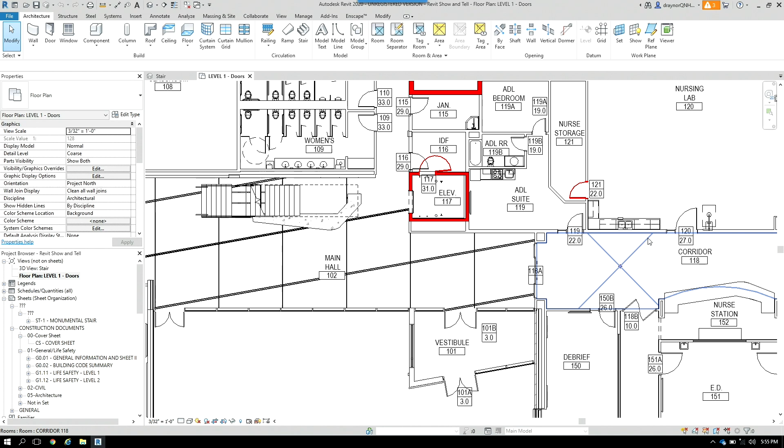And then I can say, oh wait, this door is rated, but it's not on a rated wall. That needs to be switched out. So it's just a really easy visual check for things. I also created a door tag that shows the door number and the hardware schedule. So if you're either reviewing your hardware schedule from a hardware consultant, or you're going through and reviewing submittals, you can really easily go through.

I will usually print this out and kind of highlight as I go, to make sure that I've got the right hardware set with the right door, instead of having to flip back between my plan and then my door schedule. So I've set up all sorts of different QA/QC views like this with things kind of color-coded, just so that I, being a visual person, can look in and see what's going on. This is one example.

So most recently, I'm working on a project where we have, oh, by the way, I'm Laura Kaiser. I work with Clancy and Theys Construction Company. So I've moved out of the architecture world. Now I'm in construction.

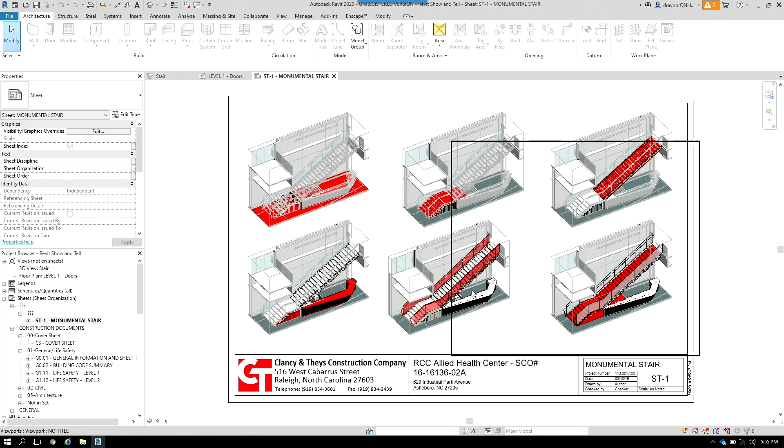So in this particular project, here's a stair, and then underneath this stair, so we have terrazzo treads on the stair. This landing is terrazzo, and then it continues underneath to become a surface for this reception desk that's under the stairs.

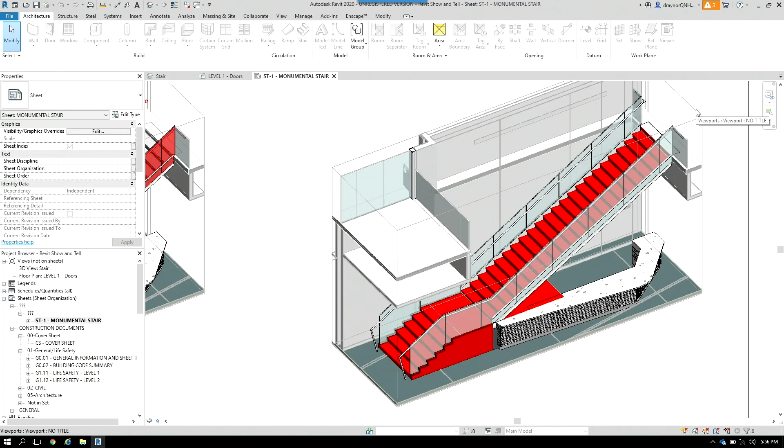Construction scheduling wise, that's actually really complicated, because we've also got down here a concrete stair and then a steel stair above. So we've got concrete stair, steel stair, terrazzo treads, and the terrazzo has to run continuous under the steel stair to become part of this reception desk.

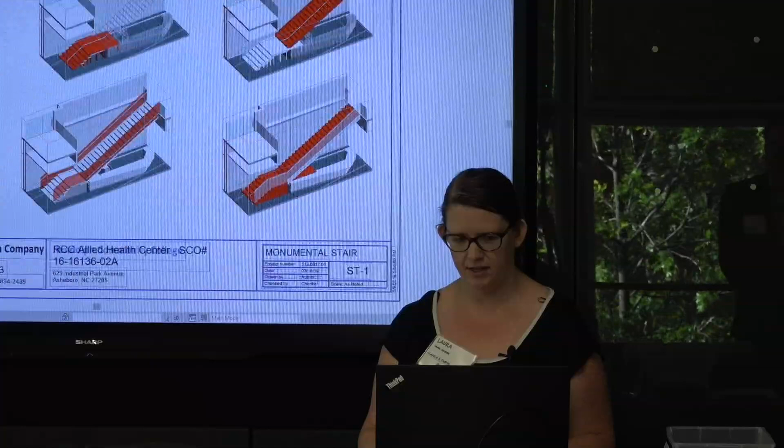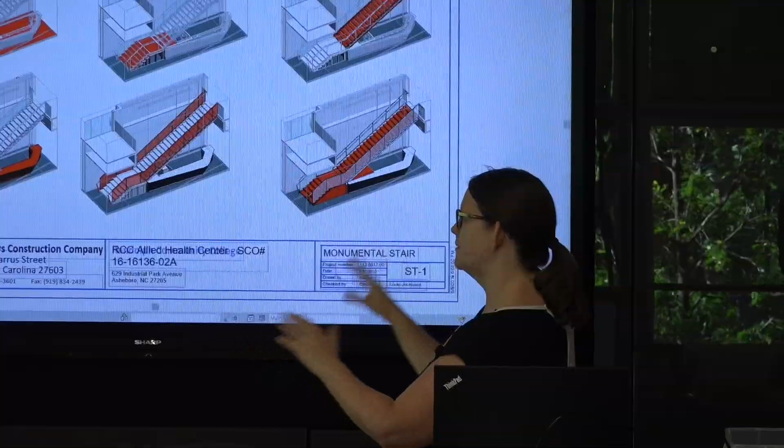So they enlisted our BIM team's help to try and figure out, the first step was to give them just some views of how this actually would be staged so that they could talk to the appropriate subcontractors to see who would be where and how that would go. So this was just really simple Revit visualization. Oh, and then glass railings, how that's all going to work as well. So that they could quickly see how it was going to work.

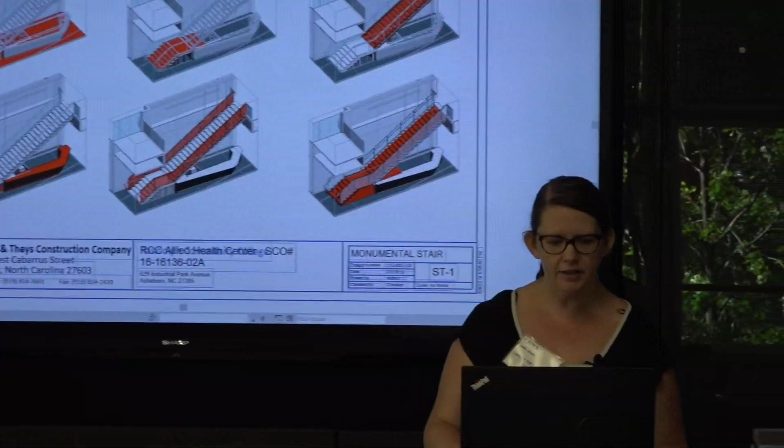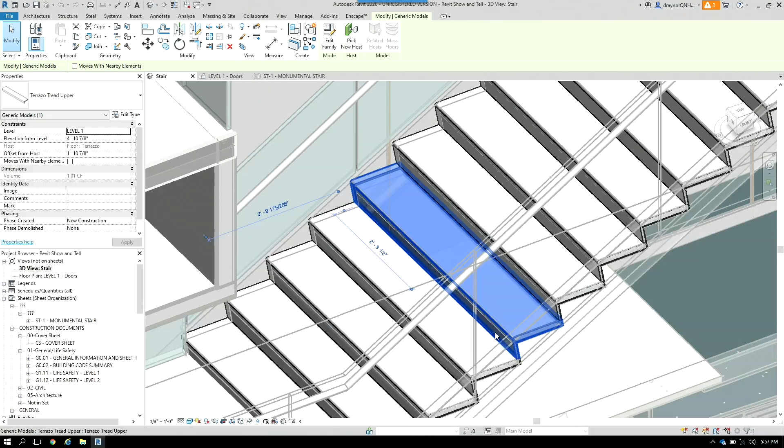And then this was a model that we got from the architect on the job, but then I went in and did some extra modeling on top of what the actual terrazzo tread thickness would be based on submittals. So we were just doing kind of extra modeling just to make sure that this would all work out in the end. So not anything super sexy, but really helpful in just trying to help the construction process along.

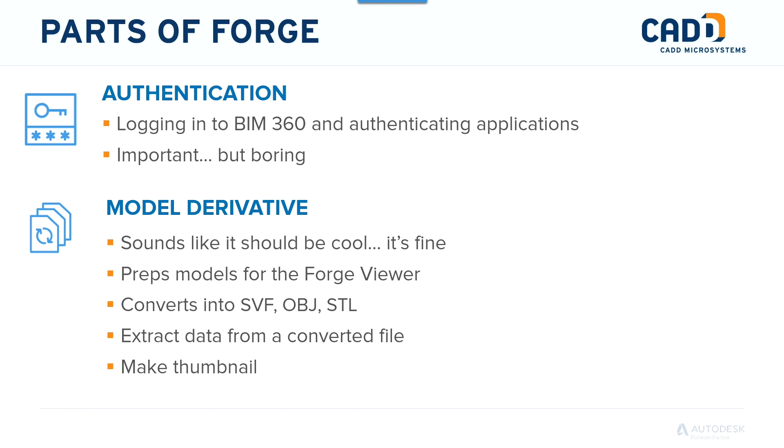There's the model derivative API, which has a really cool name, but it really doesn't do some very exciting things. So when you are looking at your Revit model or your Navisworks model or your STL file or something you've uploaded to BIM 360, you get that large model viewer and you can pan around, you can select things and see the properties. That is not your native Revit file. That has been translated into another format here.

The model derivative API is what has done that translation to the model to allow you to view it in there. So you can convert it over to that file, which is the SVF file. You can make it an OBJ file, or you can also make it an STL file. And you can pull thumb information out of it, and you can make a thumbnail from it, which is great. Yeah, it's exciting.

Webhooks are pretty cool. We haven't seen a lot of use out of these yet. It's a little new. But a webhook is a function that you can build that's going to monitor your BIM 360 folders and your files in there. And if something happens to those files or folders, you can call an action on it.

So for some reason, if I wanted to send a tweet every time somebody successfully synchronizes their Revit model that's hosted on BIM 360, the webhooks would allow me to do that. So obviously that's not a practical example, but that kind of shows you the demonstration of I can get this API talking with this API, and allow changes in my project to trigger things via the webhooks.

So this one, we're pretty excited about it. It tells you when a Forge job is done, when a file or folder is updated or deleted, or your model is synced, and then you kind of build and tell your application what to do when it gets that notification. So that one we like a lot.

There's kind of this all-encompassing one called the BIM 360 API. There's account admin, so changing permissions, adding users. There's the document management API, which we talked a little bit about before, which is the data management API. And then it's a bit of a catch-all for some of the new BIM 360 features. So issues and RFIs and the checklists were kind of released relatively recently in the BIM 360 world.

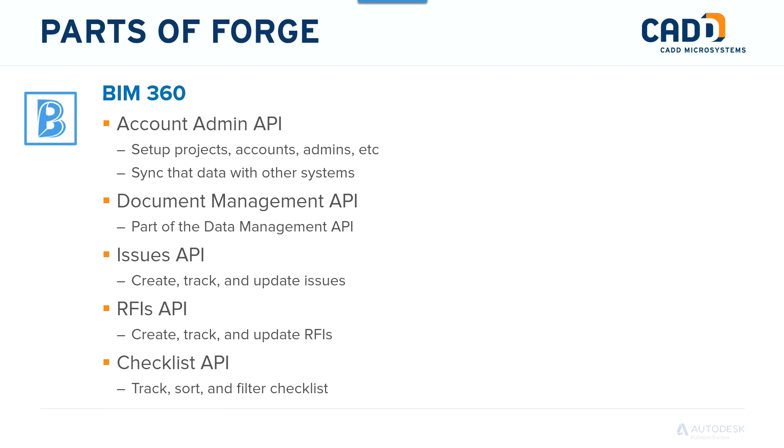The BIM 360 API allows you to manage and create and edit those outside of BIM 360. So they're still going to impact your BIM 360 project and your BIM 360 issues and things in there, but if you don't like that interface, or if you need to do something in bulk, you can create your own program that is going to impact and modify and change all that stuff in your project. So that's what this API does.

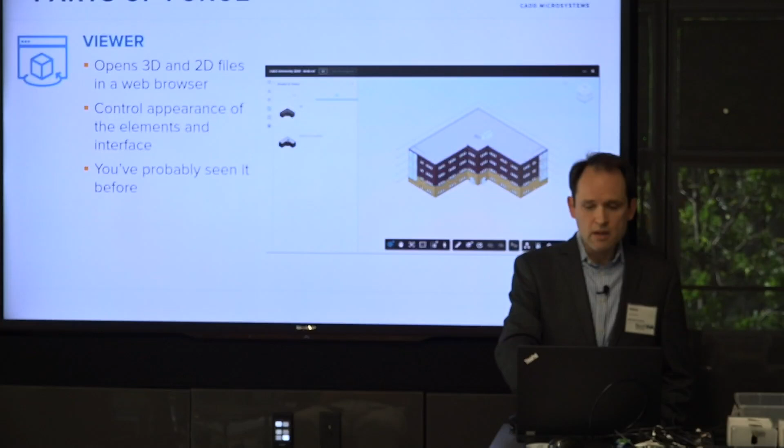This is the Viewer API, so it allows you to open up the 3D and 2D files. This is most likely what you've seen when you've seen demonstrations on BIM 360, or even if you've seen a demonstration on Forge before, because it's graphical, it's there, it's just pretty interesting to look at.

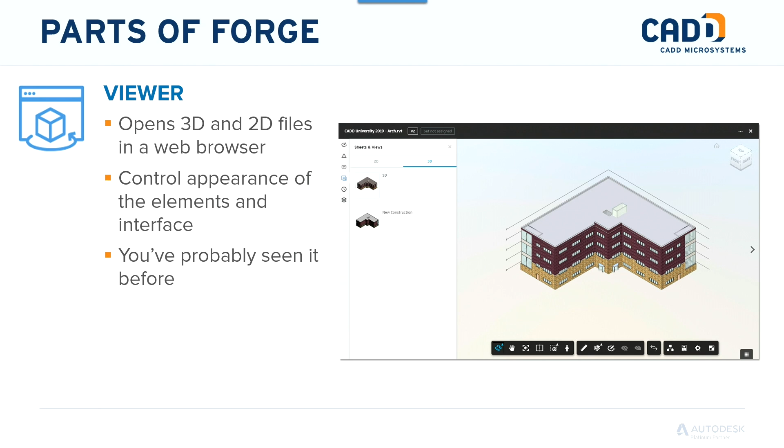So the last one that's here in my list, but the big one I want to talk about, is the Design Automation API. There is one for AutoCAD, there is now one for Revit, there's 3ds Max, and there's Inventor. They each do something a little different, but the basic idea is giving you cloud-hosted access to the software. So if you want to think of a headless version of the application running on Amazon Web Services, that's essentially what this is allowing you to do.

So I'm going to drill into the Revit one, but they all function kind of the same. You can make a desktop application. You can make a web-based application with this. So a Windows program or a website, either one. And that applies to most of the other ones as well. Now, your application and your files do have to be internet accessible, because the Forge API lives on the web. So to call the commands from the Forge API, I've got to be able to look at the internet and call back from the internet as well. Like I mentioned, it's kind of a headless Revit.

What most people are doing, what we are doing in our Forge development right now, is identifying some of our desktop add-ins for Revit that would function well in their own environment by themselves, and you strip out the user interface. And if it needs a user interface, you have to convert that over to your application or a web page as well, because you don't see Revit.

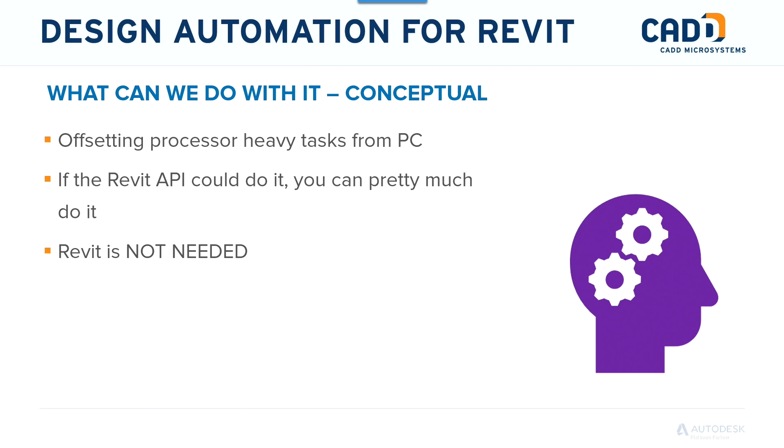Revit is not needed. To run any other Revit add-in, I need to have Revit on my desktop, which means I need to have a Revit license. To run an application on Forge with the Design Automation API, I do not need to own Revit. I do need a Revit model. So someone else can make the Revit model, stick it somewhere on the internet. I could build a web page that manipulates that model, let somebody else work on the web page, and it will go through the Design Automation API and update my Revit file.

So really, what's got me excited about it is this idea of team member collaboration without the need for Revit. Back in my prior life, we did a lot of detention work. I've probably mentioned that before here. It's in my psyche, and I'm trying to forget it.

But we had a fellow who was just phenomenal on security systems. He knew security inside and out. He was responsible for door schedule keying and making sure all the doors would line up and this would lock when this locked. We had our model in Revit, but he didn't know how to use Revit, so we'd print out the schedule, he'd mark it up, and we'd send it back. This was kind of before the Excel connections.

At this point, I would seriously consider designing an application for him that only looks at the doors. It only peels out the door hardware and key information that he needs, and he can update it and push it directly into the Revit model without needing Revit at all.

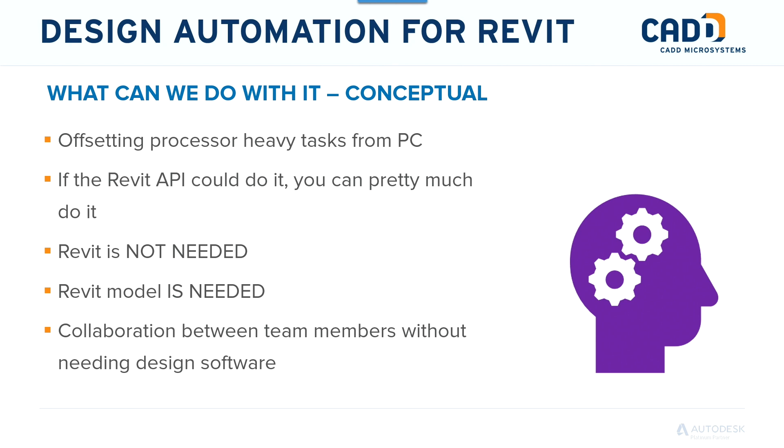A couple months ago, I was up at the Autodesk office in New England, and they had what's called the Forge Accelerator. Has anybody done an accelerator before? It's kind of like nerd camp - you go there for a week, say here's my idea, here's what I want to make, and their inside team is there, and you work with them and bounce things back and forth. So a lot of these ideas are things I saw other people working on at the accelerator.

This one was pretty cool - this was an online family parameter editor. So if I have some shared parameters now and I want somebody else to use those shared parameters, I have to send my shared parameter text file. I have to ask them to load those parameters up into my family. Hopefully they get the right ones, and hopefully they're type or instance, whichever one I need.

This website they built, again very proof of concept, but you could see where it's going - you could load an RFA file up to the website, click a button, and then the Design Automation API would push the parameters in there automatically. They would download the RFA, and it was ready for them to use. No weird interaction - obviously they could build a bulk uploader for it and have it do bulk.

The next steps they wanted to do was not only would you push the parameters themselves, they'd get a little form online, so you could start filling the parameters out, and it would push all those into the RFAs as well and have them all ready to download. So that was pretty cool.

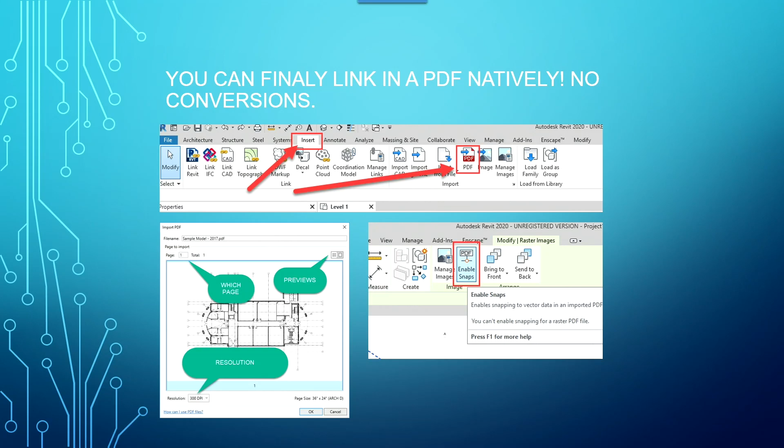Let me see, there it is. I'm going to pop Revit open here in a minute and do some live demonstrations. But basically, on the Insert tab, press the button for PDF, just like an image file you normally would, and you get this little pop-up that comes up. You can do thumbnail previews, and you can pick which page of a multi-page PDF. So if you've got 10 sheets in your set and you're linking another drawing out of the set of PDFs, you can pick which page. You can also choose a resolution, and of course, the higher the resolution, the better it looks, but the more it takes when you go to print with raster. Yes, PDFs will require you to print to raster.

Another really cool one I'll show you at the end here: if the PDF was printed to a PDF versus scanned to a PDF, you can actually use it to snap to. That makes it really nice. You don't always get it, but it's nice when it works.

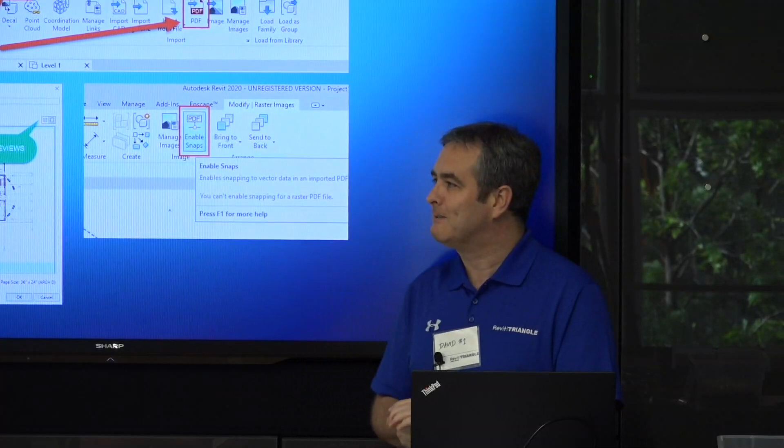I'm sure that does affect the quality, and I've already seen tweets going out about people testing the quality and accuracy of it. They would take a Revit model with walls at 30 degrees, export it to PDF, bring it back in, and see if they still get 30 degrees, and they get 29.99999. Now, some of that might be due to anti-aliasing when it goes to print. I'm not sure, but there's definitely some accuracy that you might have to worry about for fine-tuning. Revit tends to be picky about those things.

So let me see. Alt-Tab. Close this one. So we're not doing a monumental staircase, you would not want me doing stairs. Let's see here, sample model, is that it?

We'll come back to that part of it later. But for now, it's going to come up here and insert, hey, PDF. I have one prepared here that will look very similar to what you see back there. Hey, 72 dots per inch, all the way up to 600 are our choices. This one only has one page, sorry. Hit OK.

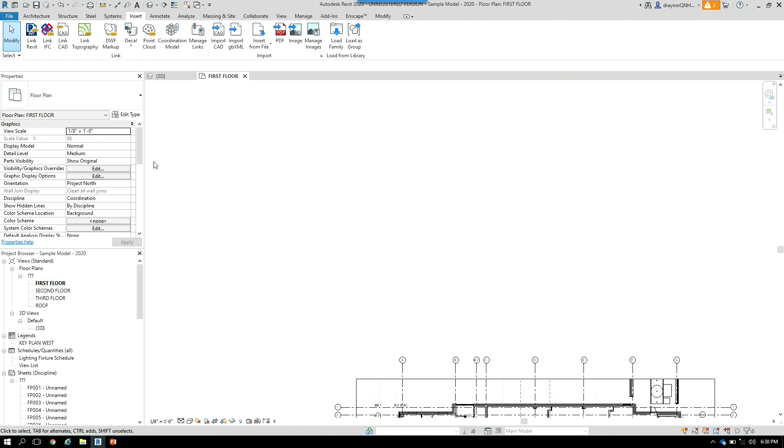Being outside of my crop region, I wonder if I'll see it. No. Plop it right there. Turn off cropping. And there is the PDF. Pretty nice, pretty good quality. You could already use that as a background if you needed to.

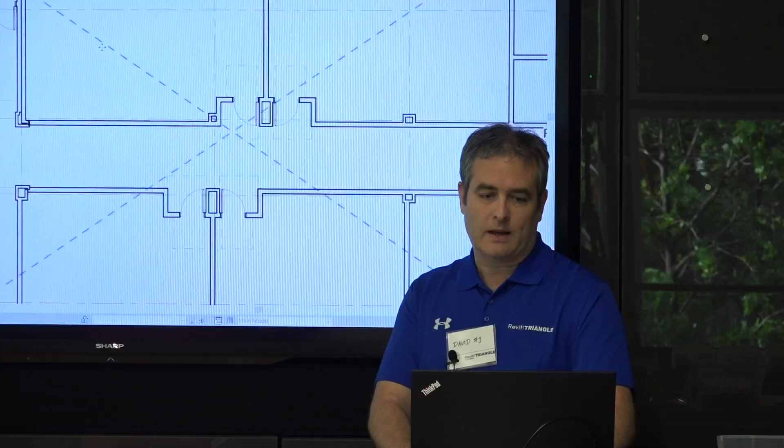Also notice you can come up here and think you can override by element and say, oh, you can't halftone it, but can you change the color? Nope. Problem with thinking on the fly. Okay.

Does it scale? It comes in 1-to-1 is what I expect. If I measure this door, it should be a 3-foot door. So if I come in here, that's usually my go-to check. Yep, 3 foot. It was an 1/8 inch scale drawing, and this is an 1/8 inch scale view. So you will need to pay attention to that.

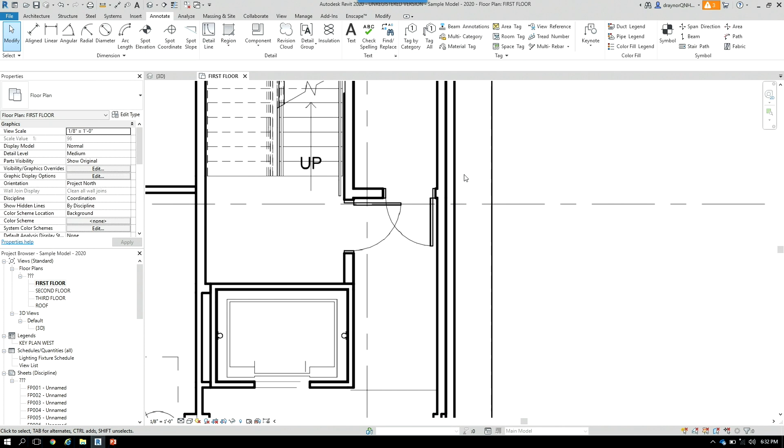But now if I come up here and I have it selected, I can enable snaps. Now with that enabled, I could go to Annotate, Detail Lines, and use the Pick Lines button, and if I pick a line, it is actually creating lines there, directly over that wall. But why would I start with just lines? I mean, walls are essentially just lines. Why don't I just go to walls?

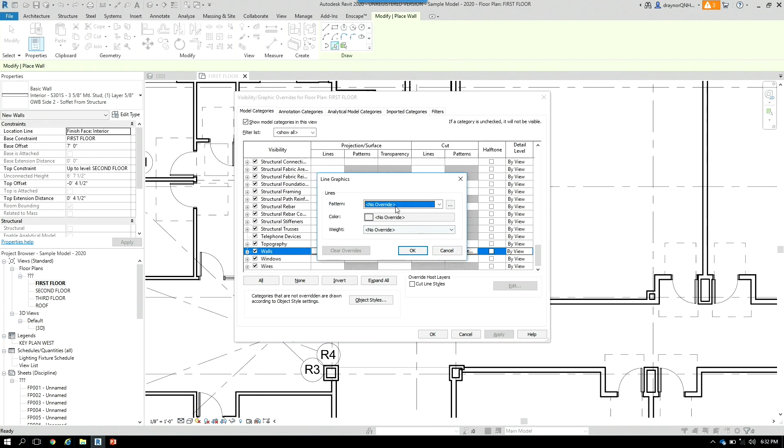And then I could pick a line, and I might say I want the finish face interior here. And just for clarity, I'm going to make sure our walls stand out. I'll make them pink, and I'll give them a weight of like 5.

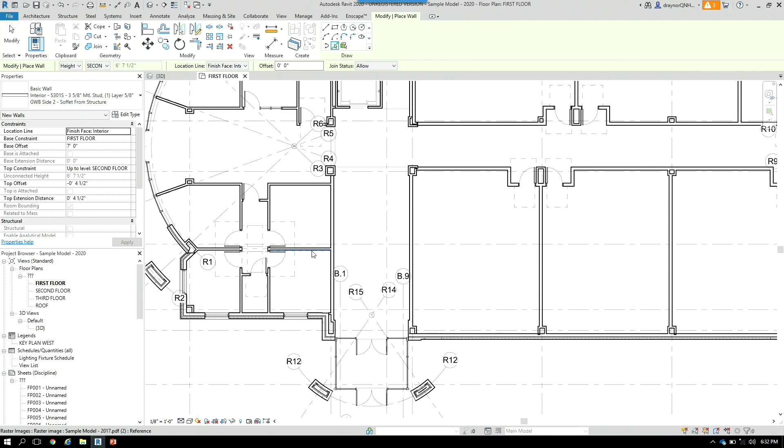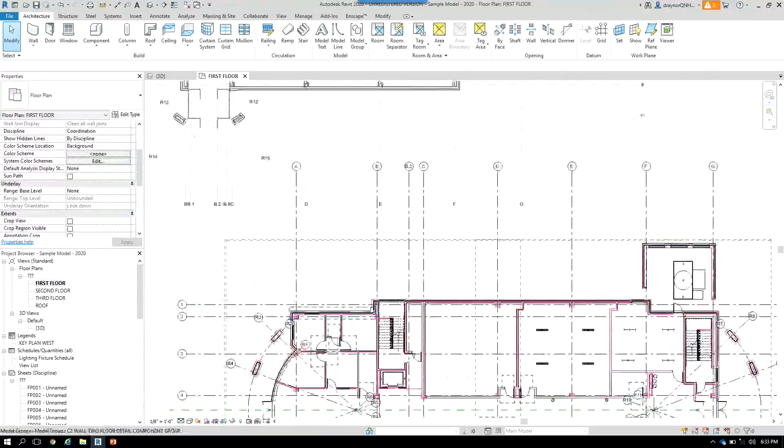Okay, what am I doing here? Says it's not visible. But I turned off cropping. Well, that's not a good choice. Well, that's where I was doing it earlier. No, it has a foreground, background option. It does have that, one of the options bar. No, that is not.

Isn't there like a blog post, the 50 things to check in Revit, why can't I see my elements? It's because the base offset of your walls itself is 7 feet. There you go. There we go. How did that happen?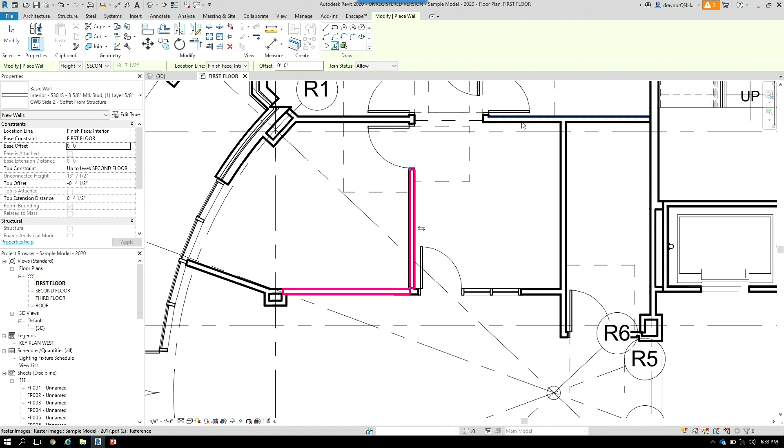Now, unfortunately, it doesn't recognize that there's doors there, so you'll still have to use the old trim commands, trim extend. Okay, that's enough of the error messages. You get the idea. If it's a wall, you can pick the exterior face of it, and since you know the thickness of your wall, just pick and click all the way around to trim and extend. Pretty cool feature.

And I'm excited to use it for ductwork or piping when those come about. So let's see, PowerPoint. I did, yep. If you scan it in, you don't get the same thing. Yeah, so that was all for that one.

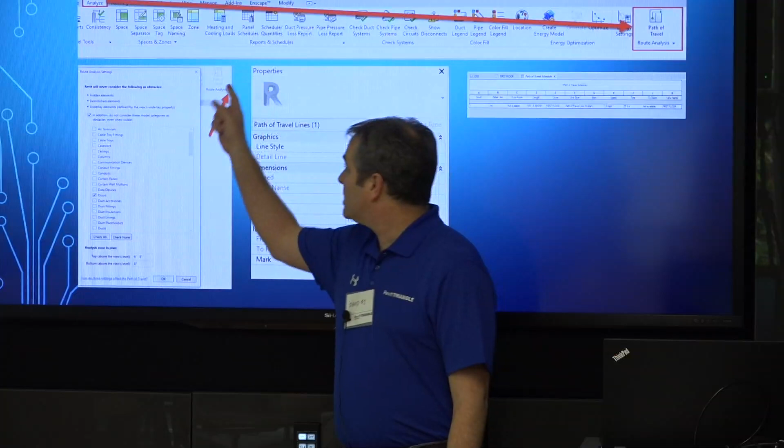Path of travel, this one's kind of cool and sort of fun to play with. Again, you go to the Analyze tab this time, but they hid this one all the way on the other side, so it's almost like a tennis match, you're going to go back and forth a bit. Once you get it open, I wanted to point out, you know how they like to hide things under these little arrowheads? There's a teeny tiny arrowhead in the corner there that brings up a pretty important dialogue. If you would like casework to be considered an obstacle, you'll need to make that choice. Otherwise, people will run right through it.

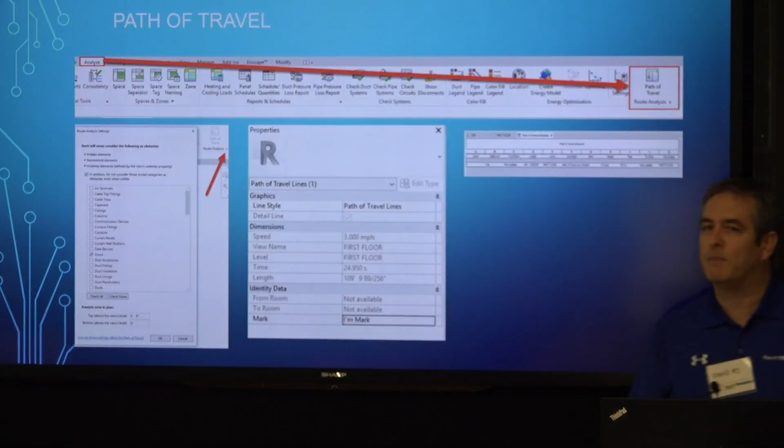Furniture, I think you'll have to select, a few things like that. But right out of the box, I found it works pretty good. The other thing I thought was funny is most of the properties about it are not editable. So if you think you walk faster than 3 miles per hour, you're going to have to wait till they open that up. They also don't have the to or from room available yet. When I looked it up, they said that's for future use. So I'm curious to know what they're going to use that for.

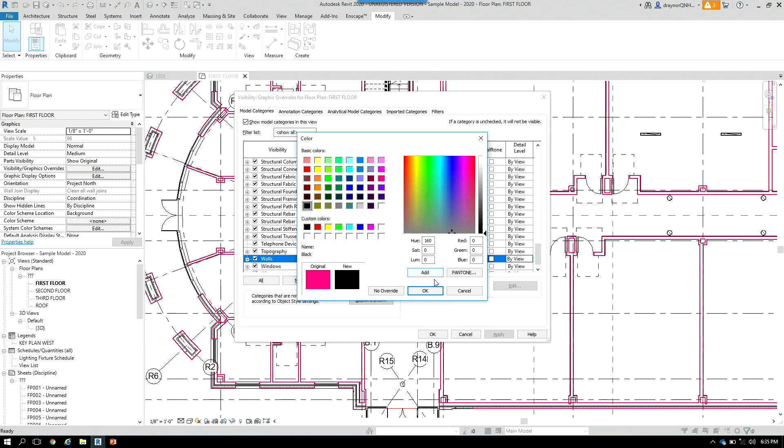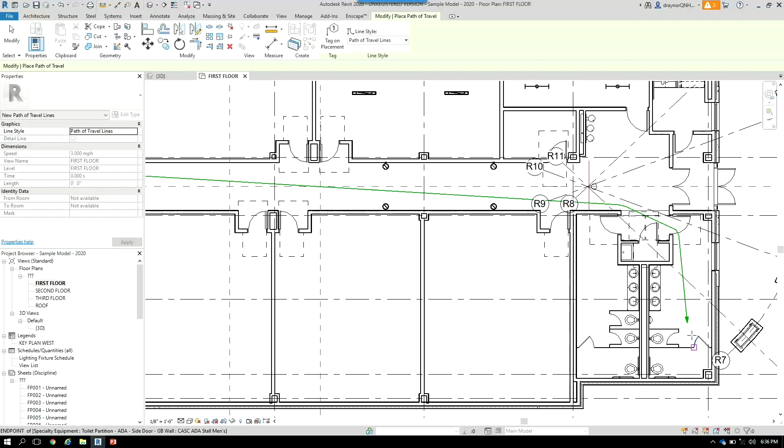All right, so a quick little demo of that. Come down here to my other model. Hey, there's my pink walls. Let's see here. Okay, there we go, and it's on the Analyze tab, all the way over on the other end. And you really just pick 2 points. So if I want to know how long it takes this person here to get to the restroom over here, it automatically goes through all the doors, kind of noticed it went through the window there, all the way down to the bathroom. And it really does pick whatever point you pick on.

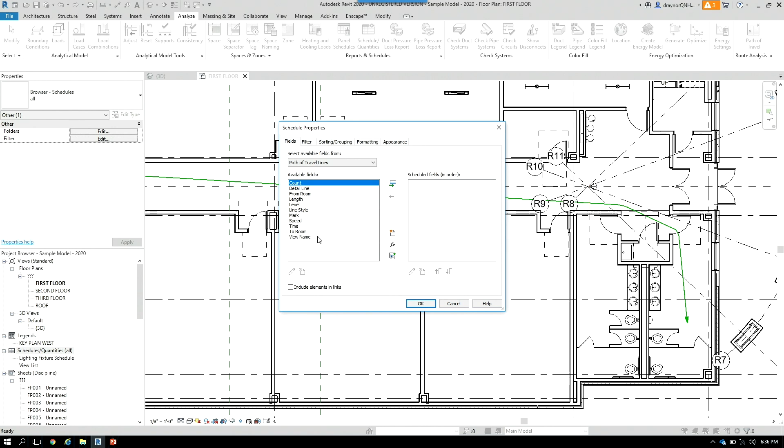If I select it here, there's those same properties, and you can give it a mark value. If I can type in there. There we go, path to restroom. Now, the reason I wanted to go ahead and put something in there as a value for that is you can schedule these. So, new schedule, path of travel. And you can pick all these properties to add to it. And just like with any other schedule, you can then do calculated parameters, in case you did think you walked faster than 3 miles per hour.

Now, I found that pretty interesting. And of course, I wanted to see where some limits were, so I tried going to the second floor and routing a path out the front door on the first floor. It did not make the leap from one floor to the next, so room for improvement there. Or maybe just a couple of compiled things that you add together, get to the stairs, out of the stairs, would probably work.

I could see it being useful for testing egress distances, not necessarily giving you a final product. Yep, the comment was that she could see it being useful for testing egress distances, not necessarily a final product.

So I did notice that the line style up here is path of travel lines. If I went to a hidden line, though, it does change the style of it. So it's whatever line styles you have defined. It defaults to that one, but I think you can change them.

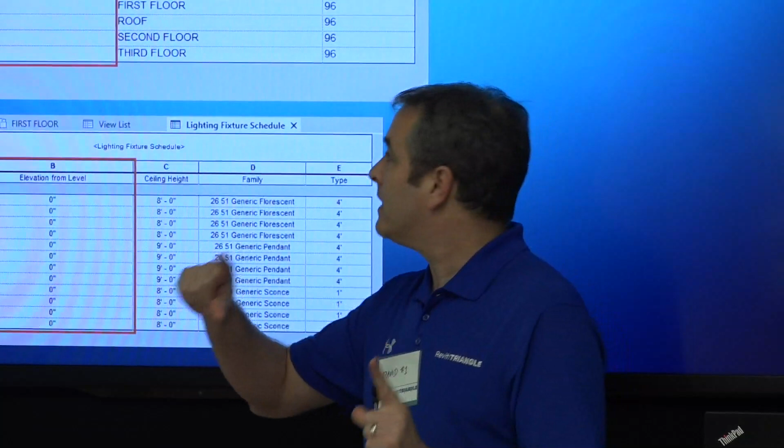Okay. Now here's one I'm excited about. They finally started opening up some new properties that we can add to our schedules. Now, I use scope boxes heavily because I like all of my views to be looking at the same place. Now, the only downside to that is sometimes you want like an odd-shaped viewport. It's not such a good strategy for that.

You tend to wait till the end of the project and then remove all of that work. All of the work of associating the views to the scope boxes. But that's a very quick way to lay out a project. Well, here you can quickly see on a schedule what views are associated to which scope box. That's pretty awesome. Another one they've opened up to us is the elevation from level.

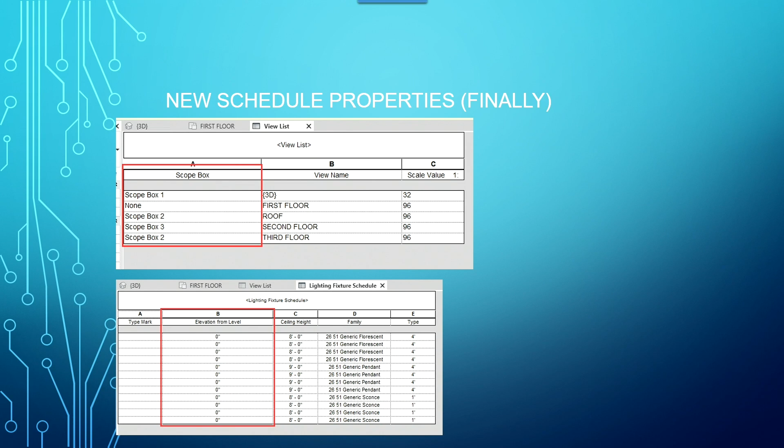For years, I have harped on offset being a useless parameter because you could not tag it and you could not schedule it. Well, imagine you have light fixtures, air terminals, receptacles, wall switches, and you want to schedule the offset. You had to make your own parameter. And that's kind of what you're seeing here.

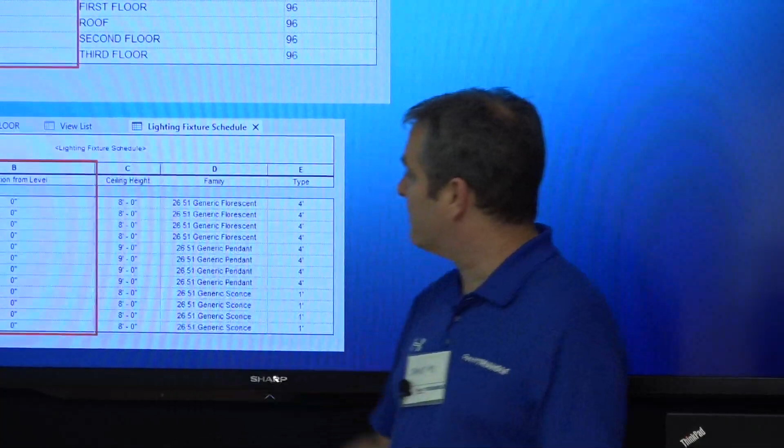I have my own parameter here for ceiling height, but I won't have to use that anymore. There's now elevation from level, which may change a lot of my content, which is unfortunate. But that's the price of progress, right?

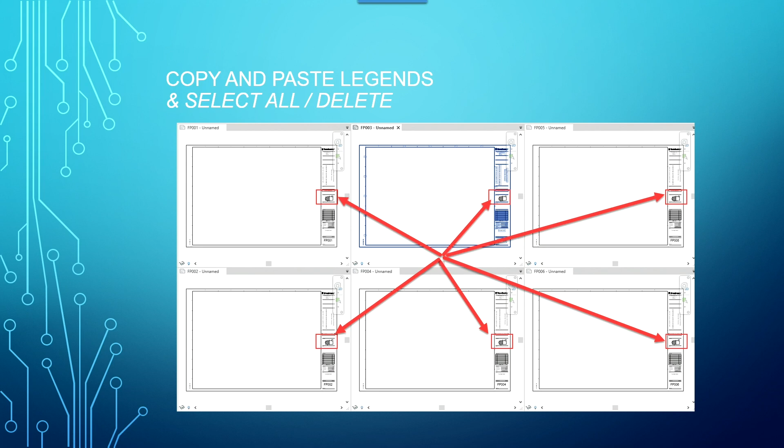Another one that I'm very excited about, you can finally copy and paste a legend from one sheet to another. And then if you regretted that decision, you can actually select all and delete them. That really opens up the power of legends being able to be on multiple sheets, because before you had to place one on every sheet. And hopefully you did so in the same spot every time.

So a lot of people wrote programs and add-ons like we were talking about earlier just to copy and paste legends. So thank you, Autodesk, for finally opening that up to us. That one's been frustrating for years. And I think that's all the ones I've prepared for.

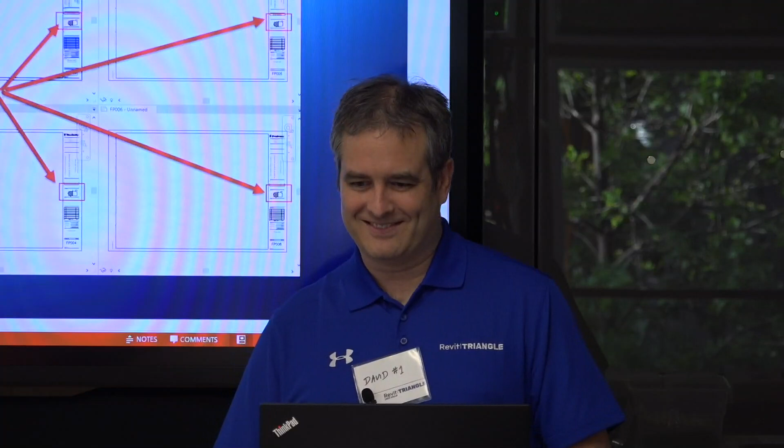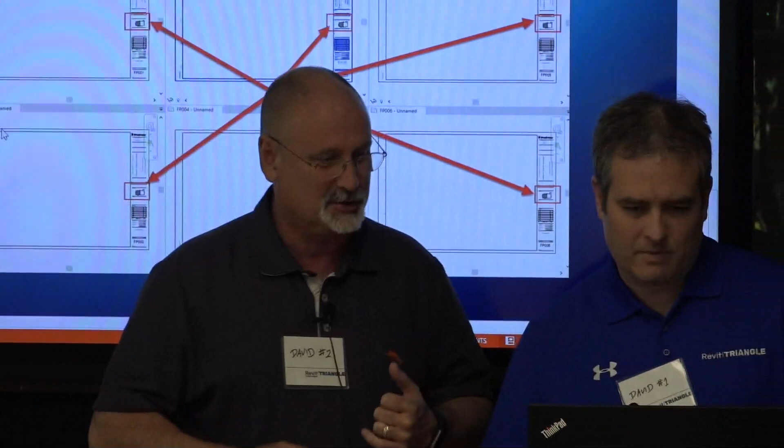I'm going to see if, see here, yours is. This is what happens when you let two of us drive. It gets a little bit scary here. You're driving. No, I'm driving. Right-hand driver. Nope, not that one. Oh, not that one. Jason's already done that one. Oh. Yeah, we don't want that one again. Where is yours? Revit. Yeah, Revit 2020 electrical updates. I'll get out of your way. Okay. I also have to open up Revit too, so let me just kind of.

I had to turn my mic on. Now you can hear me, right? So do I need to start over?

No. But either way, what happened is we actually got involved with looking at how we could improve what electrical is doing. So there was a big push this past couple of years to make things work a lot better. And every Thursday night at 8 o'clock, every 2 weeks, I'm working with the development team saying, okay, how do we make this better? A lot of good people helping out with that. Craig Woods, just another person that was helping out with this.

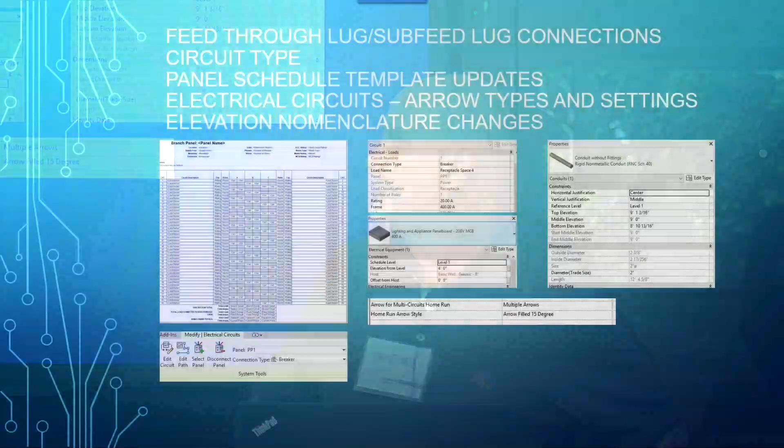So one of the things that's really cool about it, to me, is that relationship between Autodesk and the customer, and how the program works is evolving at a better rate the last 2 years than it has since I started working with the product. And that was a long time ago. It was Revit 4 when it was out. So I want to talk about electrical a little bit here tonight and kind of go through this. So we're going to cover a whole bunch of stuff here at once.

One of the big adds right now is feed-through lugs and sub-feed lug connections. These actually work now. So I can create a sub-feed lug type panel so I don't have to kind of fake it to make things go together. When you create a circuit, there's the ability to add a circuit type now, whether it's a breaker or a feed-through lug. Because of this change, they've made some changes to the panel schedule templates to allow for different loads that are being passed through from one panel to another.

The electrical circuits now have the ability to customize arrow types and how you see home run arrows. Before, you might have been lucky if you had two circuits going together that you got the arrows to show up correctly with two arrow heads on the line. In some cases, I've actually seen arrow heads show up on every single wire. So that was a little bug that kept showing up all the time.

And like David was referring to earlier, there's some elevation changes that have really helped us out. So the Dynamo routine, the only one that I've ever written in my life, about showing bottom of pipe elevation, I can actually throw that thing away now. So that's a good thing. Again, these are just some of the MEP things that we're working on. I've got a few examples of pictures here to show you.

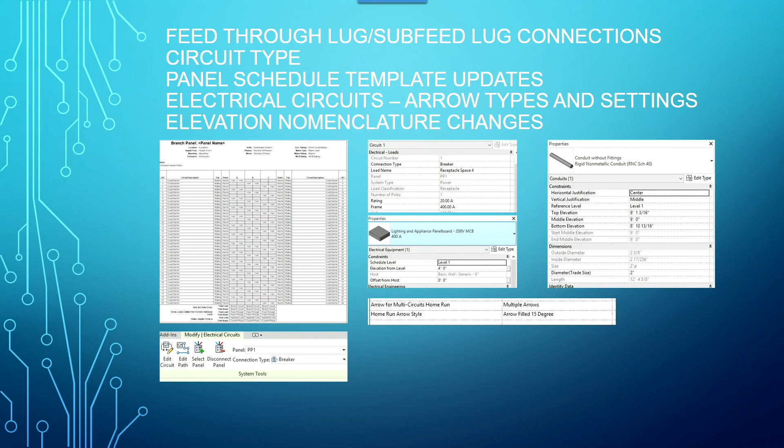So let's just jump into the program here real quick. I have to go into my vision here so I can show you this. So first off, let's talk about what we've got with this particular view. If you take a look in here, you see I've got some devices that are already connected. And if I take a look at this particular set of devices on this circuit, if I select the circuit, you're going to see a couple of options up here that are new.

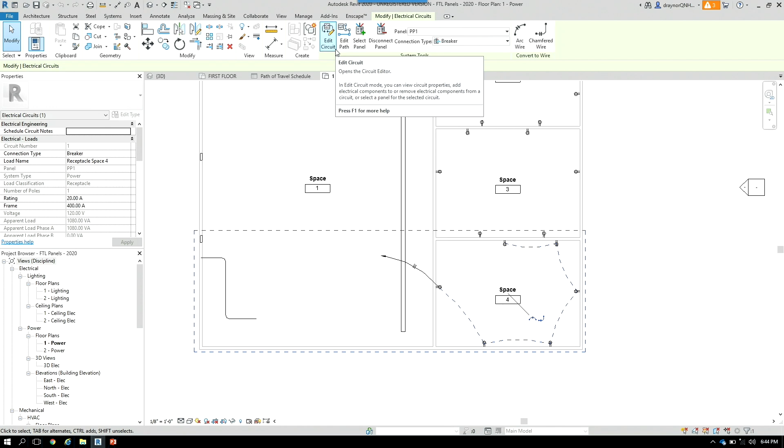Now, Circuit Path was something that came out in 2019. I don't know how many people are actually using this. This is actually a great tool because it helps you get a more accurate voltage drop calculation. By default, the circuit path goes to 9 feet, but you can adjust the height of it and make it a lot taller or shorter as you need to, and you can actually edit a representation of this path. So again, what we're trying to do is get more accurate load calculations into the program.

With this particular connection, when I created the connection, I can say that this is actually going to be a breaker connection. So this is a normal power connection. I've got a normal circuit in here, and what I'm trying to do is to create that relationship as a breaker. So when I come over here to my other panel, I've got 3 panels in line in here. I can select this, and as I create the circuit between these devices, I can say, okay, what panel am I selecting to? Power panel 1. And now I can pick feed through lugs or breaker. So you see how I automatically do that relationship.

Now the really cool part about this is I can actually have an 84 circuit panel schedule that is carrying the loads correctly all the way through. So even if you have multiple panels, and you can go to a 128 circuit schedule, it doesn't matter. If I do 3 panels together, I can sum all that up, and then when I do the panel schedule, you'll see how the loads are coming along. So again, creating the circuit is still fairly easy in here. It's not really any more complicated than it was before.

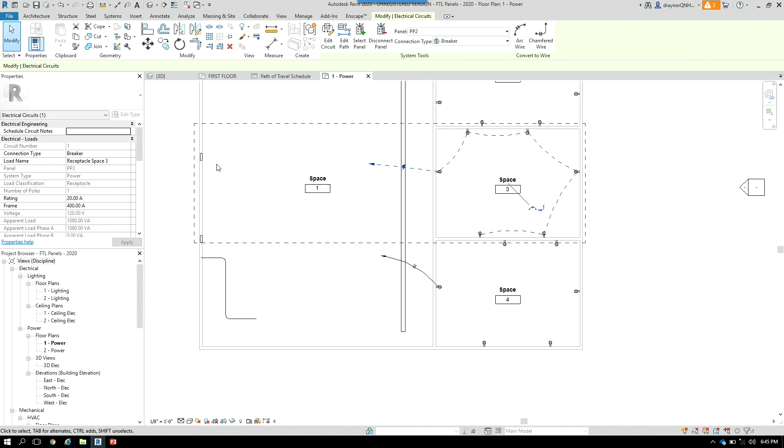I just grab some devices, filter them out here and say, okay, I'm just going to do electrical fixtures. Say okay. And I'm going to create the power circuit and say, let's go to power panel 2, my second circuit now. So I've got that feed going through to that other panel. Now when I come back and do the panel schedule for this, I'm going to choose my default template. This is one that I just made a little while ago based on the default one. For feeding to an 84 lug panel, you see the load carrying through for that particular device.

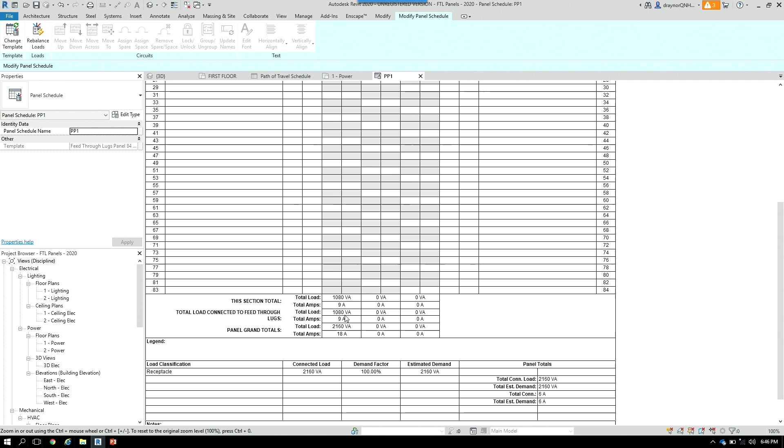Now, this is just one where I don't have the whole load showing up on this panel, but you can see where I've added a section in here and where I have my feed through lug connected. So you see how the load is passing through here now. I've got the total load from both panels, and I have the load from this panel and the load from the other panel adding through here now. This is a huge improvement. I don't know how familiar you guys are with doing electrical drawings, but the workarounds that we had to go through to get this stuff to work were just crazy, the things that we had to do behind the scenes to make it work.

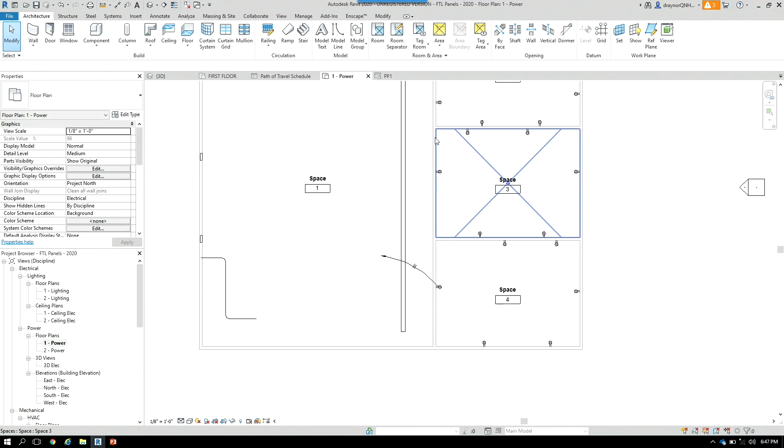We were actually manually putting these values in here, and that was not a good way to go with things. And I can continue to add loads to this. So as I go back over here to my power plan, and I do the same step in here, I go back and I'll create one more circuit here. Grab these guys, filter them out. Say, hey, let's just do the space tags.

Pick OK. And now I can come back over and say, all right, what am I going to do with this circuit? I can again select the circuit that I want to be on, 1, 2, or 3. So if I assign it to panel 3, I tell it it's a breaker in that circuit. Now I can do the same thing. I create that relationship, and I say, all right, I'm doing a power connection. This is going to become a feed-through lug.

And now it's going to tell you that if this panel doesn't have this property. This is a nice little better solution than just getting the old, you remember in the old AutoCAD days where you used to get the red circle of death? And then they gave you the yellow triangle of hope. That's what we actually called those things. You get the yellow triangle message, and it's like, we're going to give you a little bit of hope and maybe tell you what's wrong.

Well, in this case, it's actually saying, hey, this is not enabled, it's not checked. If you want it to be fed through lugs, just check the parameter on the properties and then set the connection type. So all I have to do is say enable feed through lugs, and it creates that connection, and then all I have to do is just basically select my panel. So you can see how I'm actually daisy chaining several panels together here. And as I go back to my panel schedule, I'll see all those loads populated all the way through.

That's cool. And when you think about data and how we're parsing data now, and as you look at Forge, you look at what Jason was referring to earlier about being able to harvest that data out of the model. This is a more predictable result for the data that we need, that even if we go to external programs to do load calculations, this is a way that we can get a better representation of that data of how it's supposed to be connected in the model. So that's a pretty cool little feature, and when you think ahead about what Autodesk is doing with this, of exposing this data to make it more flexible, this is just a great representation of that tool.

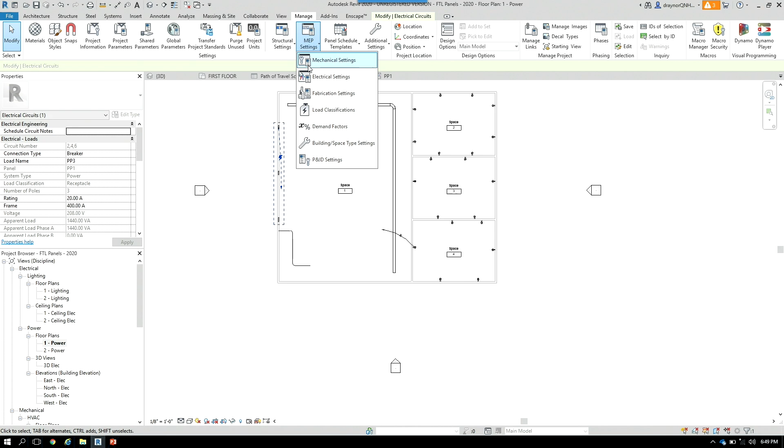Now, a couple other things in here real quick to show you. If I go to Manage, and I go to MEP Settings, and I go down to my electrical settings now, I did want to point a couple things out about wiring in here. This was always a problem child for me. When I come over here and I look at wiring, it's like, okay, how do I want to show the home run arrows? So now I get this type of an option. I can choose to do multiple arrows.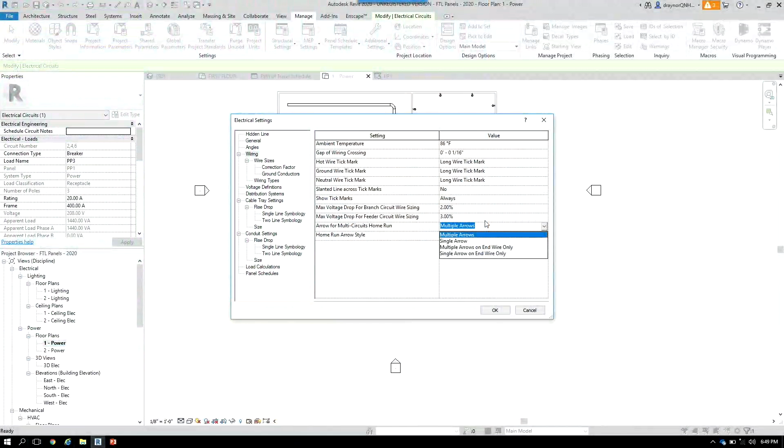So if I do 2 devices connected together to a junction box, and then I got the home run coming from the junction box, I can say, show me 2 arrows to represent the 2 circuits, or still show me a single arrow, and this is the fix for the other problem that we had, that now the arrows will only show up on the end wire only. Okay, so I can get multiple arrows and single arrows just on that end wire, that last wire going out.

Again, this was a huge problem. It's been around for years, especially for people who are still doing wiring. We don't, but occasionally we will still show a home run wire, and if I've got multiple circuits going through one connection, that's critical. Another really cool thing now is that I can steal. Begging, borrowing, and stealing is a great thing. You know, a lot of people who work on projects know that that's what you do a lot of, is steal from another project.

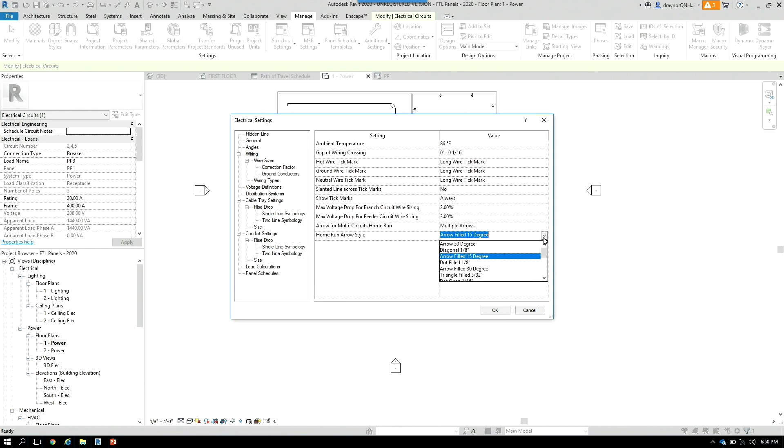So what we're doing is just simply stealing the dimension arrowhead styles and saying, okay, we're going to open these up, and any arrowhead styles that are in your model right now can be used as a home run circuit wire. So you can actually customize these now and have a different looking home run arrow if you want.

So it's a great little new feature there, and it may seem like it's simple, but getting the quality of the drafting that everybody gets so concerned about, that's a really big step. One of the things that David alluded to that, like I said, I'm really happy about that they finally did is changing how elevation is read.

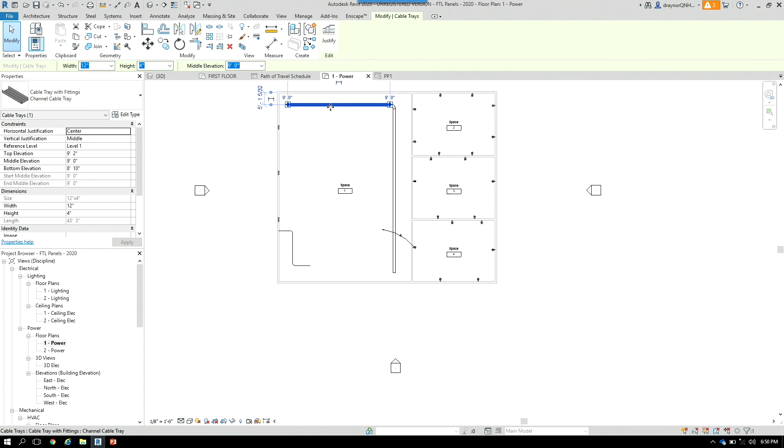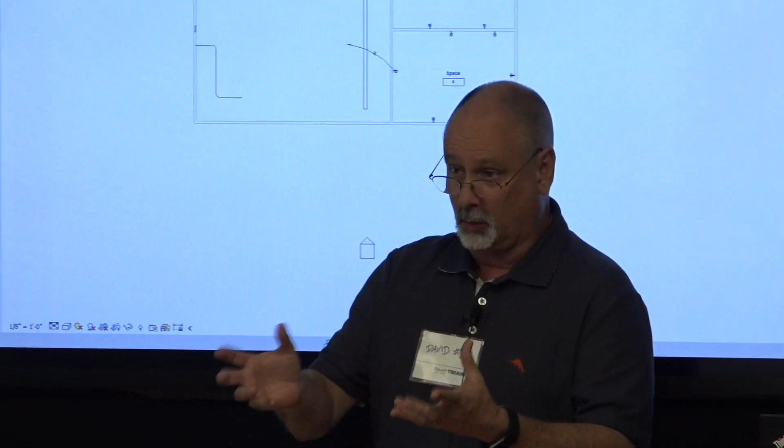So I want to point out something here. If you look with cable tray and fittings, this has always been a problem because you always got offset. Where was offset measured to? It's measured to the center of the device. I've yet to see anybody place a cable tray by the center of the cable tray. And if we're doing water and wastewater like we are, and we have gravity-fed systems, what's the critical dimension? It's not the center of the pipe, it's the bottom of the pipe. Those are the critical dimensions.

So all of these are now exposed into 3 groups: top elevation, middle elevation, and bottom elevation. And it doesn't say offset. I'm so happy about that because now it's elevation relative to the level that you're working with. And these are exposed parameters. And this is the other thing that's critical about this.

If I'm making a schedule, I don't have to go and create a parameter for this elevation. I don't have to write a formula to do the math to split a pipe diameter in half to give me a bottom of pipe elevation. It's actually reading the true pipe elevation. So in addition to having the routing capabilities, which we've had, to do top and bottom justification for duct and pipe and conduit and cable tray, I now have this information exposed so that I can put it in a tag, I can put it in a report, and I can put it in a schedule.

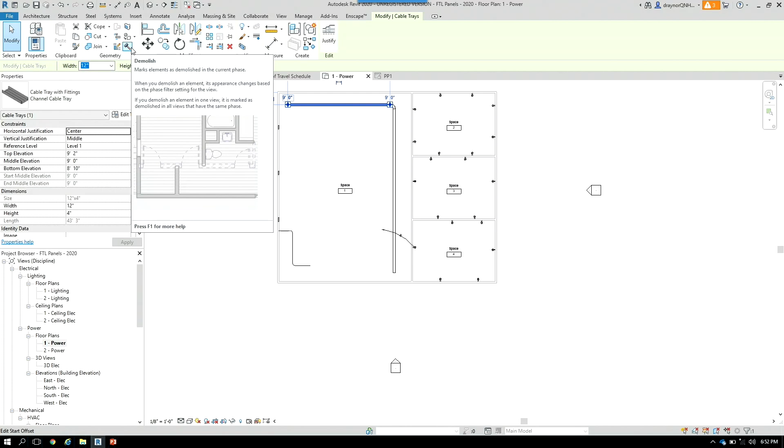These are huge improvements. And I know people talk about, well, it didn't have a whole lot in here. You know how much time I'm gonna save just with these improvements here? On every one of my projects, it's those little things that add up and make a big difference. So these are the three big ones that I had that I was really excited about. There's a lot more going on with 2020. We're gonna be rolling it out in September.

We're a little bit ahead of David, but we kind of jump on this thing. We like to be on that bleeding edge. David's on the comfortable edge, and then he calls me up later and says, "How'd it go?" And I'll be sitting there going, "Help me!"

No, but you know, it's really cool what they're doing with the software package and with the updates that come out on a more regular basis. You know, you just got a lot more stability. Has anybody got any questions so far about any of this stuff?

Yes, sir. I'm from an architectural background, so this is... So, yeah, Jason's from an architectural background. He doesn't understand any of this. So that's fine. It is.

We have a highly customized version of Revit that we run, that we have a lot of our own add-ins and everything like that. And we have gigabytes of content. It takes us 6 months to get the product ready to roll out at a minimum. And the fact that we're looking at doing this on some of our current projects, you know, when I finally passed this on to our electrical group, they got really excited about some of the changes. Now, they're always electrical. They're going to be looking for more.

But the ability to have this data exposed is just much, much better. And the elevation stuff goes across the board on MEP. That just makes a big difference for all of our users, just kind of making it have a more natural nomenclature, natural word flow. A lot better. Easier to work with, too. Anybody else?

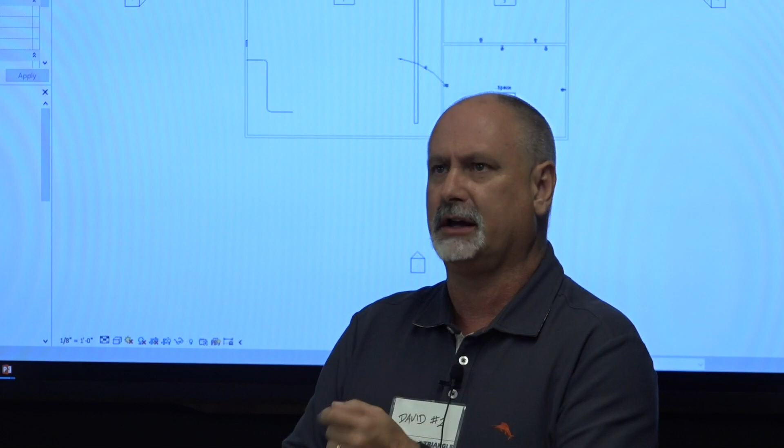Is it a game changer for other families? For other categories? Yeah, I think what I was reading through is like mechanical equipment, electrical fixtures, lighting devices, pipe, duct, conduit, cable tray, specialty equipment, furniture, casework. I don't know if doors and windows had that.

I don't think they got the elevation mark, but I don't think they need it because they're a bunch of architects. They already know how it all works. Engineers, we're a little bit slower, so.

Well, and here's the other flip side of it too. We use a lot of non-hosted families. We very rarely use hosted families, and part of the reason why we didn't was because the offset value is not working correctly. I'd be a lot more likely to look at them now to say, okay, this makes more sense for me to make this receptacle hosted, because now I can tell somebody that the elevation to the middle of the fixture is 1 foot 8 inches or 1 foot 6 inches, whatever the code requires. It's clear communication of what design intent is.

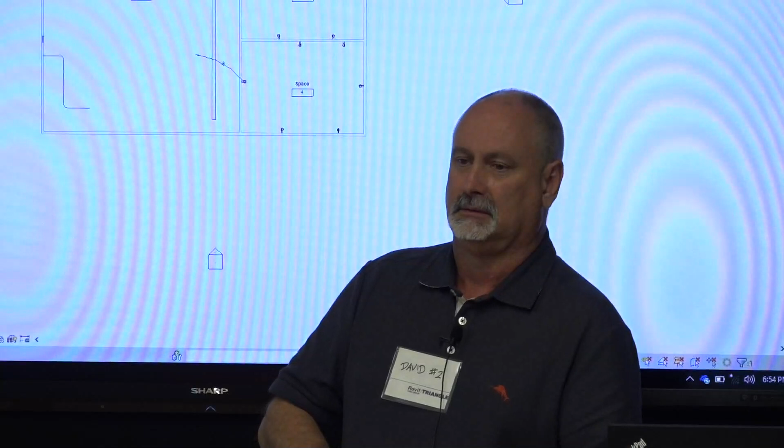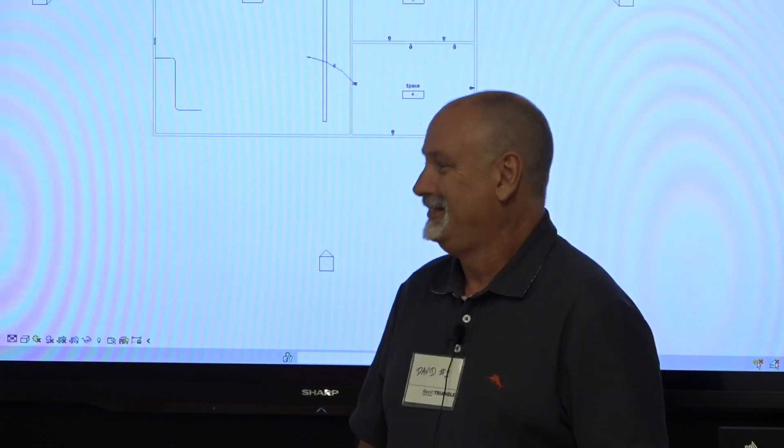Anybody else? Cool stuff? I think that's cool because now Navis can read that, right? Oh, yes. Looking at these properties, they're not pulling. Yeah, the comment is Navisworks can actually read this. So yes, Glue will be able to read this very well. Because you always get that, right? Oh, yeah. Bottom of pipe there, right? Yeah, I can't tell, I need to look at properties where it just says center line of pipe.

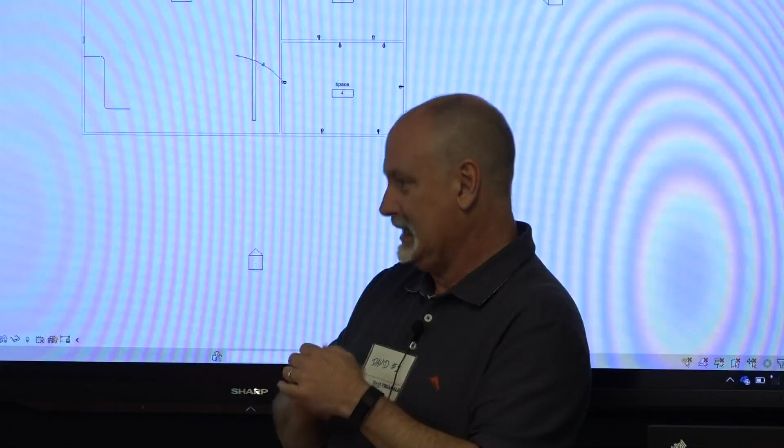Exactly. Actually, I was on a support call the other day where the guy wasn't allowed to get the other consultants' Revit project models because they were all on different versions. We're not talking about different builds, they were in different versions. And so what they were sharing were Navisworks files. But there were things missing out of the Navisworks files, and they were getting Navisworks files from the 2016 Navisworks exporter, and so there was a lot of data that was missing, and the guy could not parse through and figure out, I don't even know what this device is. He couldn't figure it out.

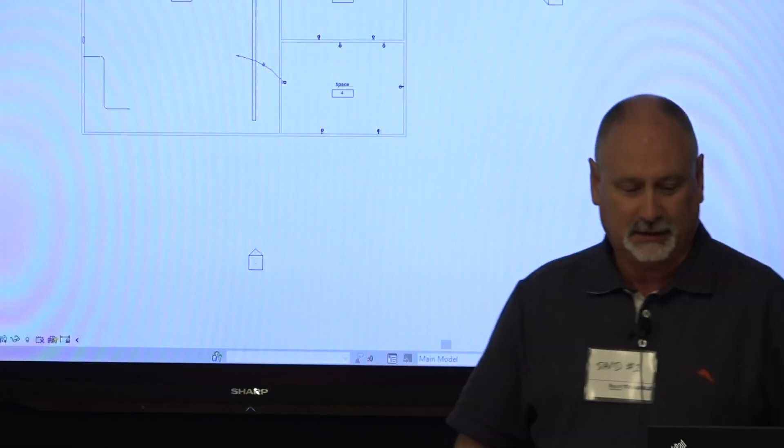But just get everybody on 2020 and you have all this, you don't have to worry about it. I told him that, and he didn't like my response. I can't get these guys to upgrade. Don't ever go to a new release. Not in my case. I can't get there fast enough this time.